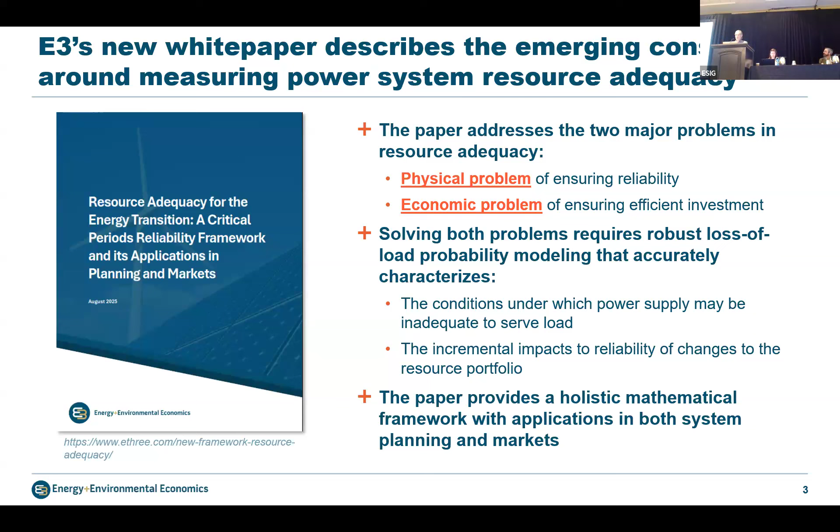Why do we need a scientific approach for resource adequacy need determination and accreditation? Because it's really important. It's too important not to do this scientifically. Determination of resource adequacy need is critical for electric system reliability and is a huge driver of electricity costs for consumers. Accurate accreditation is a primary signal for the value of new resources and is necessary for economically efficient investment.

And if someone were interested in hedging their risks against volatile capacity spot markets, what you need is a fundamentals-driven, well-formulated spot market in which you can reasonably anticipate potential price movements, so that your hedges can be effective and you know how much to pay for them. If you're doing your accreditation based on a heuristic, or even worse, based on politics, those are risks that aren't easy to hedge, and those will make your hedging activities likely ineffective.

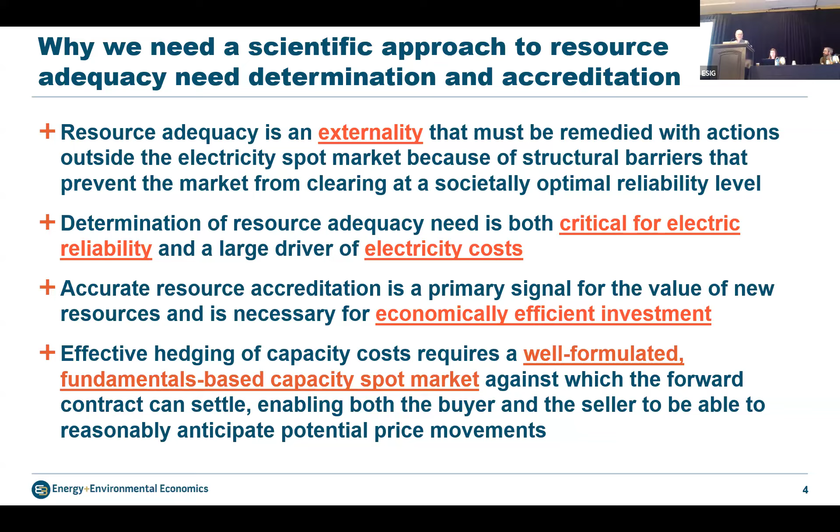And the recent developments in the industry have really made clear the need for a change in our traditional accreditation methods. We're already seeing that the hours that are critical for reliability are not necessarily the peak load hours. California's rotating blackouts on August 13th and 14th of 2020 occurred in the evening after the sun went down, not during the afternoon when load was highest.

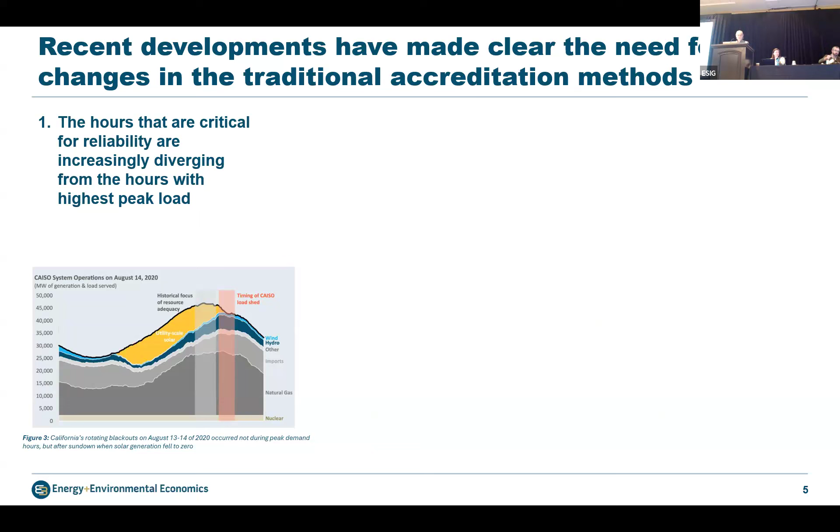Relatedly, we're seeing that saturation and interactive effects among variable and energy limited resources are becoming increasingly important as the penetration of those resources grows, and accurately capturing those phenomena will be critical for accreditation and reliability.

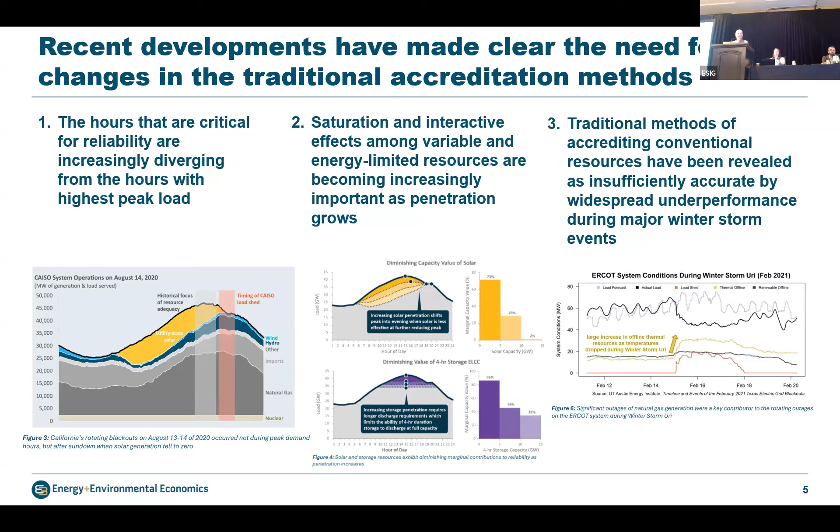And while there's been so much attention paid on the accreditation of renewables up until now, what we really are seeing the last few years is that the accreditation of the thermal fleet is actually way more important than whatever we do with renewables and energy storage. And we've seen that our thermal resources have not performed at their accredited values during recent very extreme winter weather events. And so that makes it really critically important to accurately and scientifically accredit those resources as well.

So the key elements of the critical periods framework that you'll read about in our paper, which I'll go through one by one in my talk today, are the following four. The first step is to determine the total reliability need.

This is based on the quantity of equivalent perfect capacity needed to meet a specified reliability standard. The second step is literally a derivative of the first, which is to calculate the marginal ELCC of individual resources based on their contribution toward the total reliability need, which can also be seen through their expected performance during critical periods, as I will go through.

The third step is to determine the total procurement need, which is different from the total reliability need, because of the phenomena we're talking about, the critical periods moving in time. The total procurement need is the sum of the marginal ELCCs of the individual resources in a reliable portfolio, or equivalently, the expected load during the critical periods.

The last step is to allocate that procurement need in a market to load serving entities, and that should be done based on their expected contribution to the need for capacity, i.e. their expected load during critical periods.

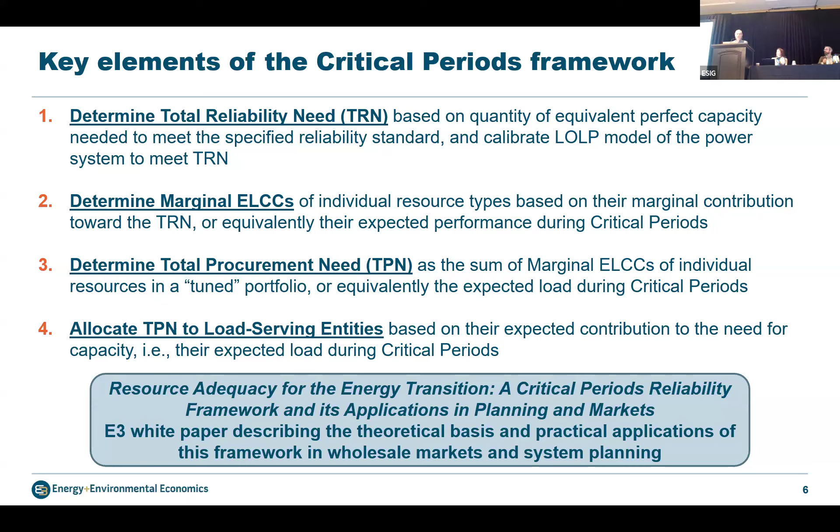Loss of load probability modeling is the foundation for all of this analysis, the foundation of the mathematics. Loss of load modeling can be thought of as an organized way to consider all of the conditions in which supply might not be sufficient to serve load, including very extreme weather creating high loads in any season, summer or winter, and correlations between load and renewable supply conditions, energy and capacity limitations.

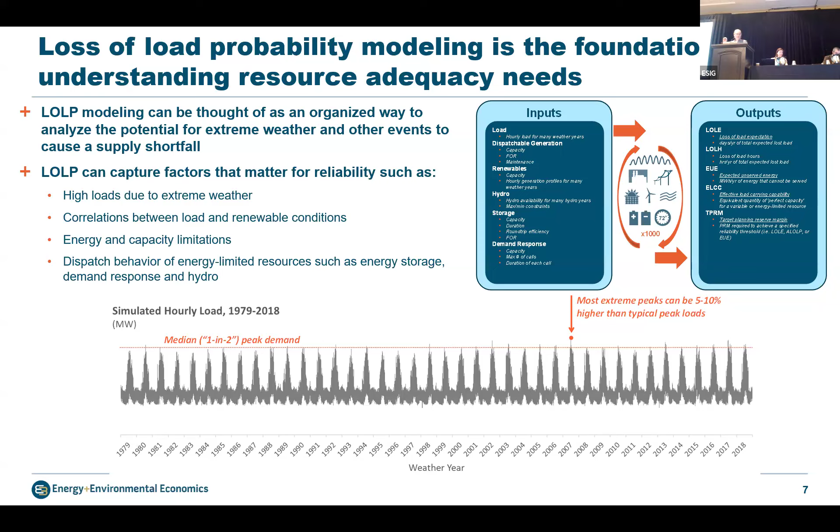Even though our megawatts are denominated in capacity, loss of load probability modeling and ELCC also capture energy limitations and any correlated outages, and other dispatch limitations.

We define the total reliability need as the quantity of perfect capacity that is needed to reach your selected resource adequacy target. One day in ten years is the target most commonly used.

There's nothing magic about that target, other than it's like once in a long while, like the frequency with which you hope politicians won't get too mad if you have to shut off their people's lights. I don't think it's more economical or scientific than that, but it could be. And if you wanted to make this extremely scientific, that fits in at the front end of this framework and becomes your standard off of which everything else is developed.

Your planning reserve margin is the quantity of perfect capacity needed, your TRN, divided by the one-in-two peak load, by convention. And again, you could do that a different way. By convention, it's divided by the one-in-two peak load, minus one. And that also considers, even though it's based on your peak, performance and loads throughout the entire year. It's not just a peak-based standard, because the modeling considers every hour.

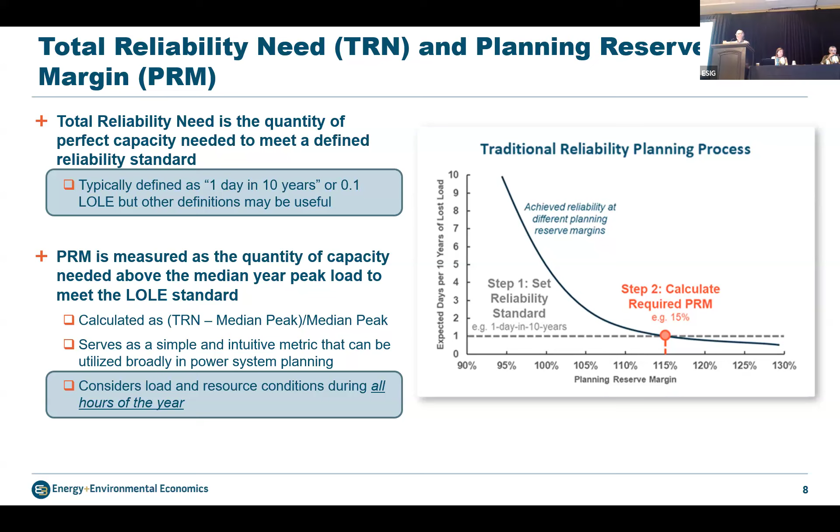The PRM is really a residual calculation. It's not strictly needed in the construct, but it's convenient and useful because it helps you understand what your need is and how it changes as your load changes.

The conventional accreditation framework rests on simplifying assumptions that are increasingly inaccurate. In effect, we've been treating the capacity of a system as if it's a linear function of all of the resources in that system, and we have added up our capacity using a simple summation.

The original version used the installed capacity method: add up all my megawatts. I know that my megawatts aren't always there, so I add a reserve margin on top of that to reflect the fact that my resources aren't all perfectly reliable. And I'm good to go.

And that works as long as the following conditions occur: there are small differences in forced outage rates and performance among my resources, and each resource is independent, so there's no interaction between them.

Then I can incorporate forced outages through performance penalties and use a UCAP method instead of an ICAP method, and I get a little better. But even a UCAP method isn't good enough, isn't scientific enough, and the reason is because you rarely have loss of load when you have an average number of thermal resource outages.

If a normal set of outages is happening, you're probably fine. What happens is, the time you're most likely to have loss of load is when you have more than usual, a greater than usual number of thermal outages.

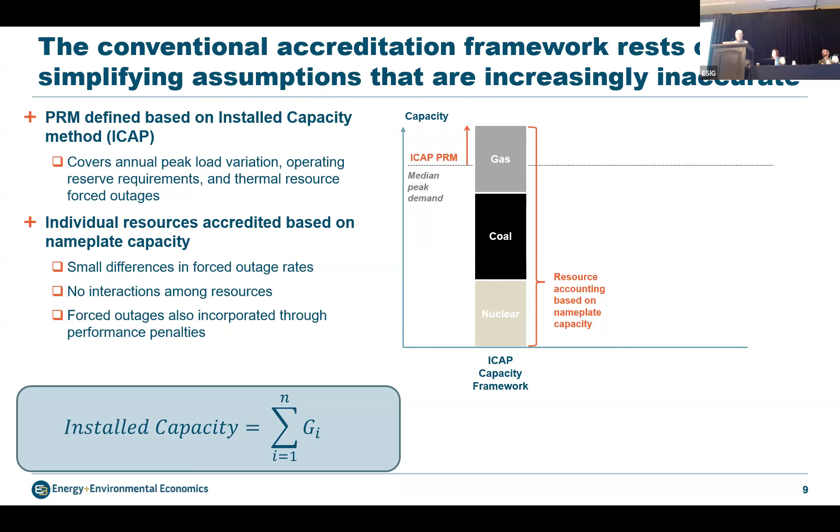So when we add up all the resources that are offline during all the loss of load events we observe, it's generally much higher than the EFOR rate of the entire fleet. So even UCAP is an overestimate of the performance of the thermal fleet.

So we need to move to a better framework. The critical periods framework is more accurate and it's more adaptable to a diverse resource mix. Here now we define the PRM just based on the need for equivalent perfect capacity. This now makes the PRM independent of the resource portfolio. It's only based on load and maybe operating reserves.

Remember, in the old framework, the PRM was dependent on your accreditation. So the worse your accreditation was, the higher your resource need would be, the higher your PRM would be. Here our PRM is independent, and all of the resource infirmities are captured in the resource accreditation. This is necessary because we now have large differences in availability during critical hours. It would be absurd to credit solar or wind at their nameplate value alongside gas or coal.

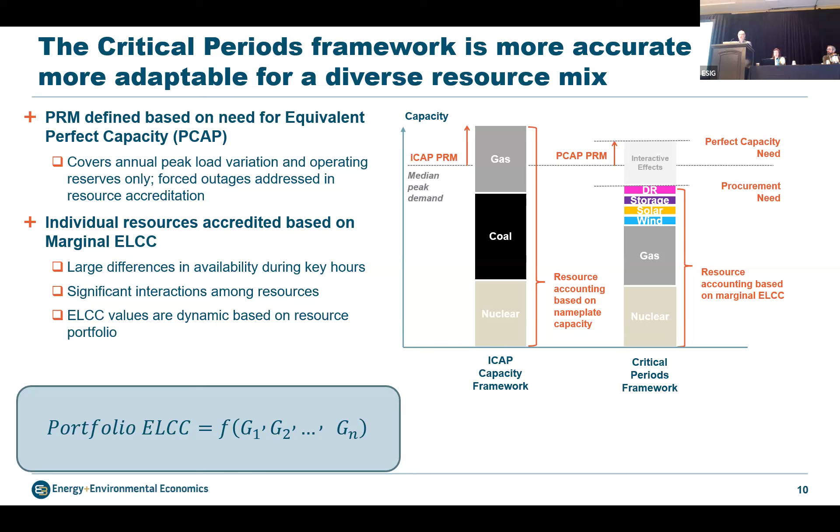There are significant interactions among resources, and ELCC values are dynamic based on the portfolio. So it's not a simple sum of the resources in the portfolio. It's actually a complex function of each of the individual resources in the portfolio.

This complex function looks like this. The portfolio ELCC is a function of each of the resources. It's a multidimensional function. The marginal ELCC can be thought of as the change in the portfolio ELCC with the change in any one of the resources. So it's rise over run. In other words, it's the partial derivative of the portfolio ELCC function with respect to change in any one resource type.

The functional form of the surface is unknowable. We only observe this through the functioning of our loss of load model, but we can measure the gradient of the surface at various points on it to help us understand how our total portfolio ELCC changes as we change the portfolio.

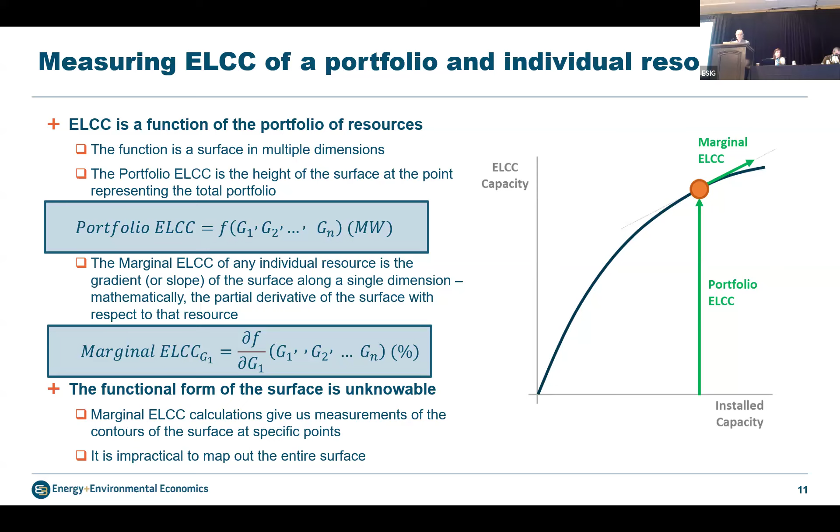So this reflects the fact that no resource is perfect. Every resource is compared to an equivalent perfect capacity resource, which creates a level playing field for all resources in the portfolio, again, accounting for all the factors that can affect resource availability during the critical hours, including energy availability, hourly variability in output, duration, use limitations, correlated outages, temperature-related derates, et cetera.

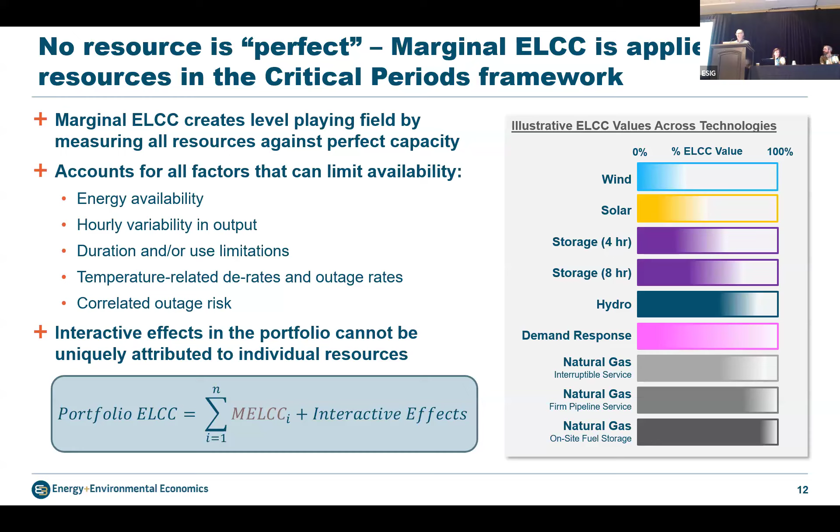Now, we need to recognize, and a key part of the paper is understanding that there's a difference between the sum of the marginal ELCCs and the total amount of capacity that the portfolio provides. These are the interactive effects. And it's really mathematically impossible—there's no mathematically unique way to allocate these diversity effects, these portfolio effects, among individual resources in the portfolio. You can really only think of them as belonging to the portfolio as a whole. And that becomes important for procurement, especially in the market context, as we'll see.

So the marginal ELCC framework is important for both system planning and markets. For system planning, we need accurate marginal accreditation to identify optimal resource additions. We don't need to accredit existing resources just for planning. We just need to know how much total, cumulative capacity our existing resources give us, and then how much new capacity new resources give us.

The market implementation is a little bit different because we do have a need to accredit existing resources in the market. And we have to accredit them based on market concepts also at that marginal level, the marginal ELCC. Why? Well, first of all, existing resources are a perfect substitute for new resources. We need to accredit new resources accurately to have efficient investment. We need to accredit existing resources the same as new resources because they're perfect substitutes for each other. And because in a market, all grid services are compensated at their marginal value. That's what markets do. That's what sends efficient signals. That's what our markets are supposed to do.

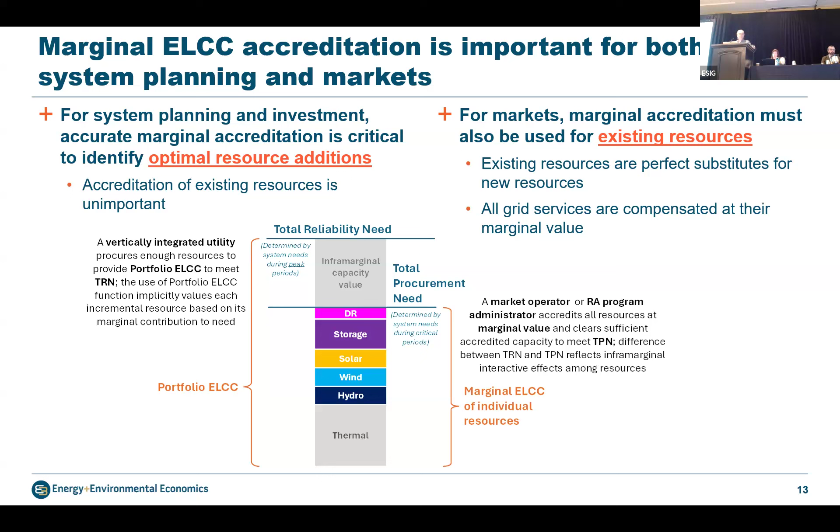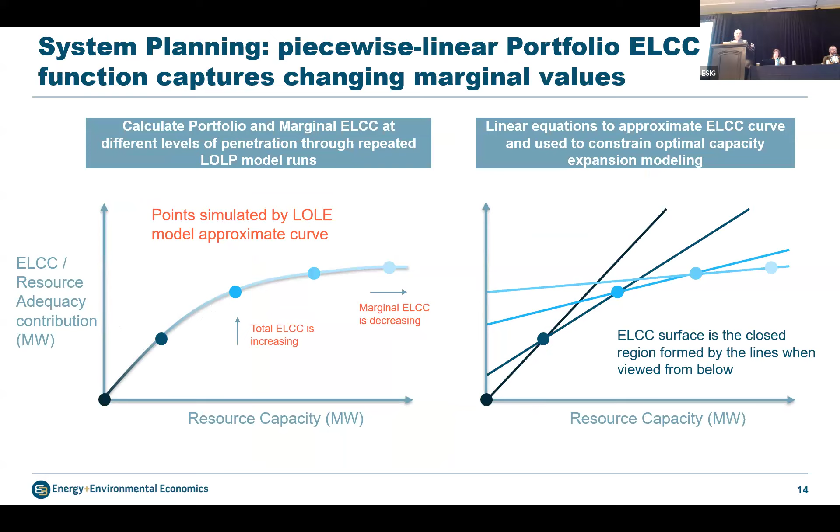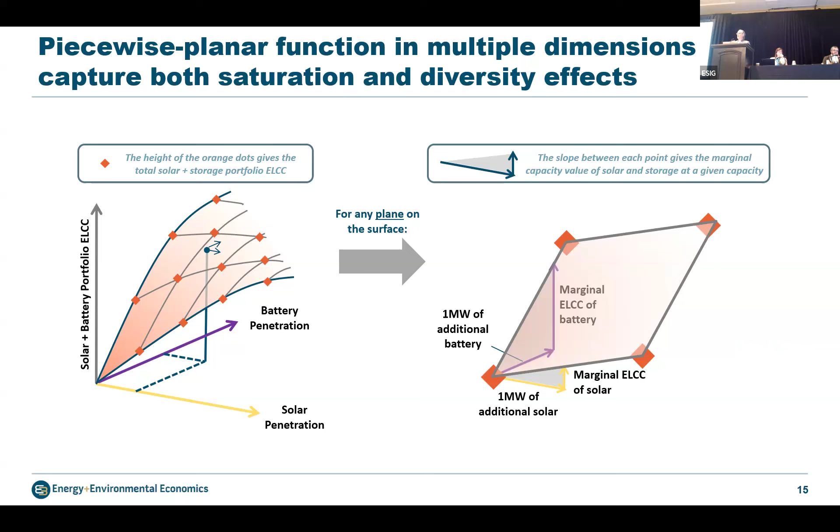For system planning now, we can take these ELCC concepts and sketch them out over large changes to the portfolio, creating ELCC curves and/or surfaces in multiple dimensions. This helps us understand, as I change the amount of resources I have in the portfolio along any dimension, how much the total reliable value of my portfolio changes. That's what helps me understand how to make efficient investments in my system.

In markets, we accredit all of the resources based on those marginal values. But we have to introduce this new concept, which I mentioned earlier, called the total procurement need, which is less than the total reliability need by the amount of those interactive effects.

So the total procurement need is in effect the sum of all the marginal ELCCs in a reliable portfolio. And all the math is in the appendix of the paper, so you can go and trace that all out if you're of the mind to do that. And I expect in this room, some people will want to do that, which is exciting.

It's both the interactive effects that I get from a portfolio of a whole bunch of different resources, where the marginals add up to my net peak. I'm confident because it derives from the loss of load math that I have enough resources to meet the gross peak — in fact, all loads up to a 1-day-in-10-year standard.

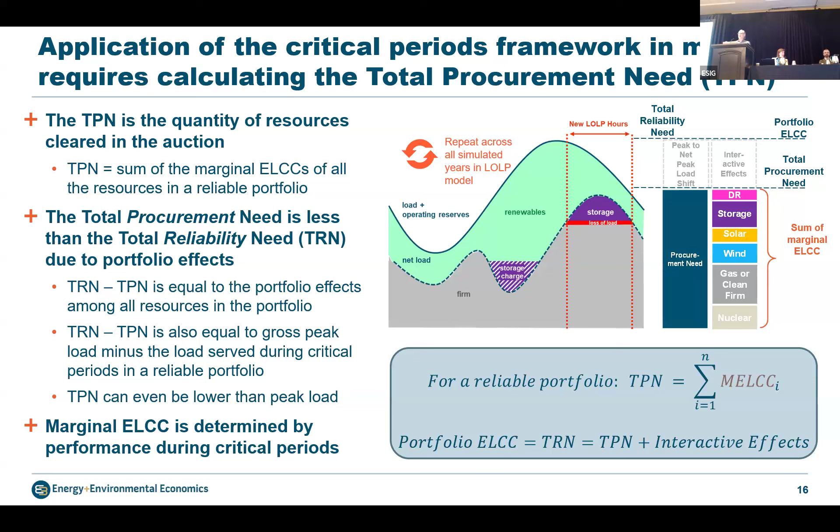So what the paper tries to do is just describe where most of the markets are moving and where many of the utilities are moving as well. It doesn't really break new conceptual ground — it really reiterates concepts that are out there, but hopefully puts them together in a framework that kind of ties together the planning and the markets.

And just to show you a map of all of the markets that are moving towards this framework in general: New York ISO was the first one, then PJM, MISO, and ISO New England is also proposing to move to an MRI approach. They're all using different computational methods, and we'll hear a lot today about the different computational methods.

But they all are largely doing the same conceptual thing, which is looking at those critical periods when we really need the resources, when we're most likely to have a loss of load event, looking at how each resource performs during those types of events, and using that as the basis for both need, procurement determination, and resource accreditation.

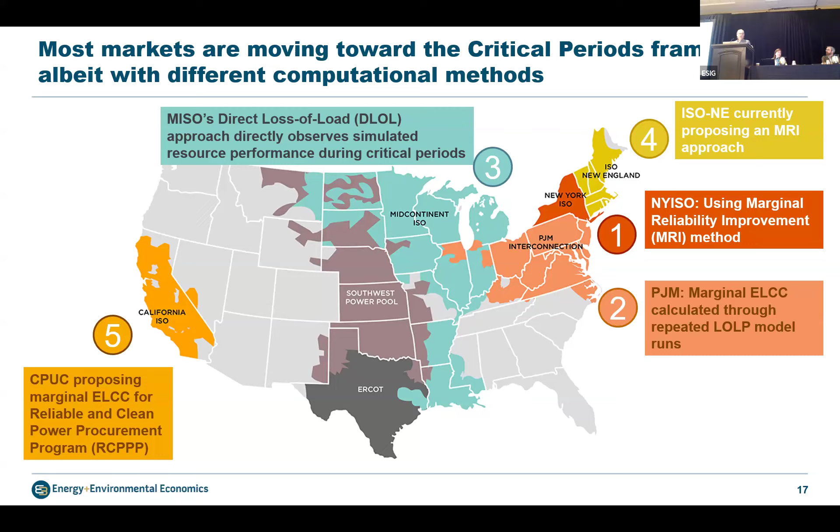And then lastly, I'll make one final point about an aspect of the framework that none of the markets are really doing yet. MISO is the closest to this — they're looking at this, which is to allocate the need also based on that load during the critical hours.

Most of the markets are still allocating need based on the peak hours, even as their accreditation recognizes that the resource performance is most important during the critical hours. And this creates a disconnect between the signals that are sent to loads and the signals that are sent to resources.

This is most easy to understand using an electric vehicle example from California, where we're actively encouraging people to charge their electric vehicles during the daytime when we don't have a resource crunch. This increases the peak load and might increase an LSE's allocation of the system-wide need, thereby increasing their costs, even while it's helping the system become more reliable and reducing costs for the system as a whole.

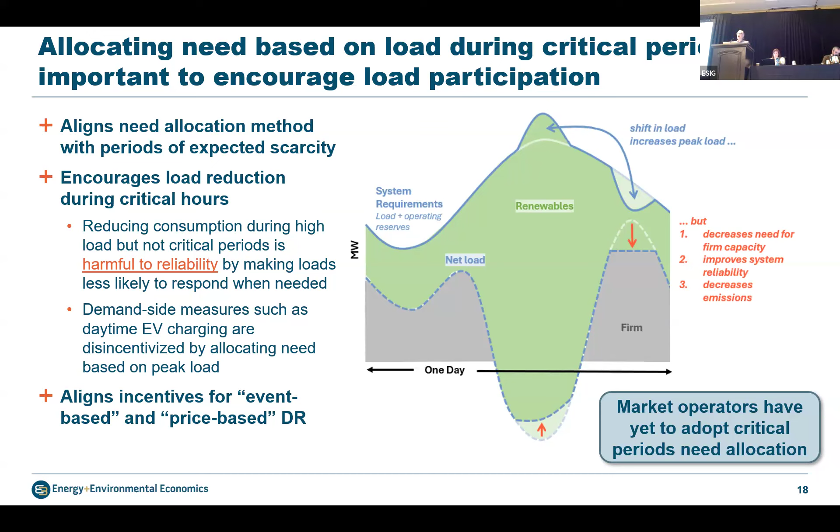So you can see the perverse incentive that this sends and the need to correct this by targeting our resource and need allocation to the LSEs based on their contribution to the actual need on the system, which is during the critical hours. So I hope that was helpful as an overall framework, and I'm looking forward to hearing the rest of the panel. Thank you.

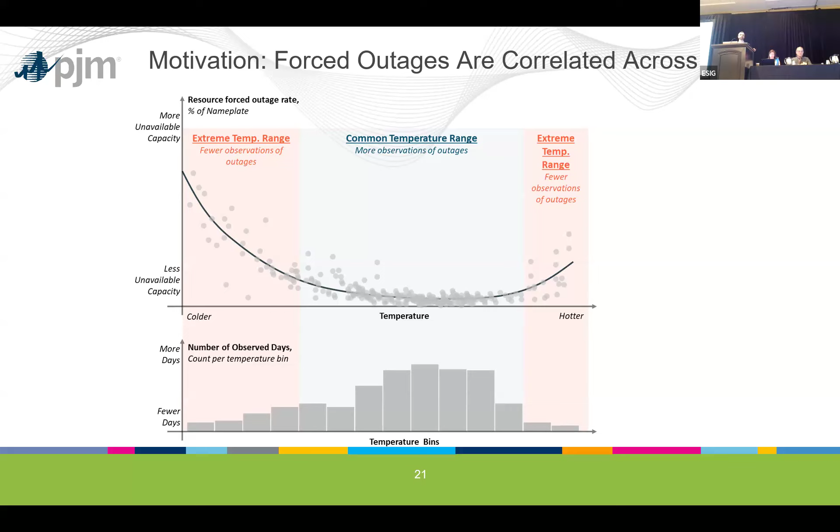That's the motivation why we really wanted to dive into this. In some sense, the motivation was just as much about getting the risk modeling right as getting the accreditation right, because the accreditation really just pops out of the risk model.

I don't really have to spend too much time on this. PJM has what we call an ELCC framework, but really we calculate it in a way that's consistent with MRI, just like New York and New England. I probably don't have to go through the math because Arne already did.

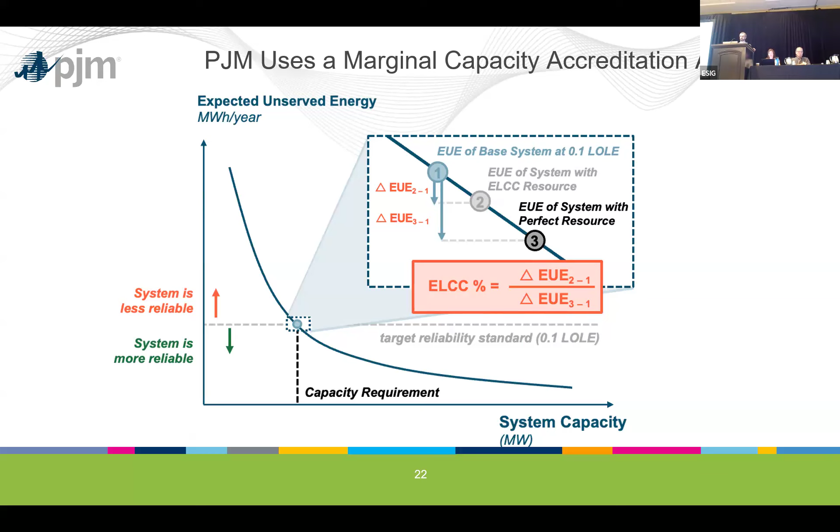So just to give an overview of how PJM puts these pieces together, and I'll try to keep an eye on the time: PJM looks at 30 years of weather history going back to 1993. We derive, using those weather inputs and other inputs as well, a load forecast model essentially for each historical weather scenario.

We also take a projected resource mix and performance for the delivery year in question, and model the unit, class, and fleet performance for thermal and variable generation as a stochastic function of temperature by resampling against historical availability, for which we have data back to 2012, not 30 years. I'll talk about how we match the historically observed performance to the longer weather history in a bit.

Then we plug all of these into a giant Monte Carlo simulation model where we take the 31 different weather years, different load scenarios for each of those years, and 100 alternate resource adequacy performance draws for each of those 31 times 13, and you get something like 40,000 simulated years.

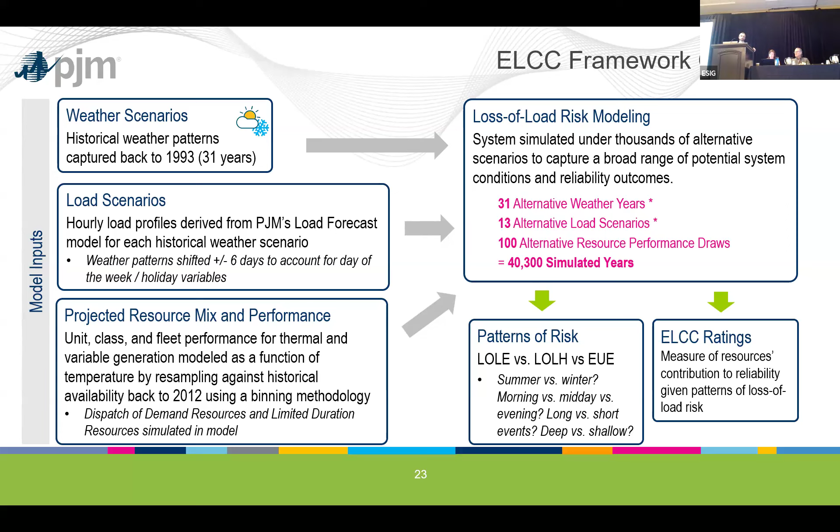One item of interest: while we calibrate to a performance target expressed in LOLE terms, 1-in-10 LOLE, our ELCC ratings are actually based on relative improvement—the improvement that a given resource or resource class has in terms of EUE reliability, assessed in EUE terms, relative to the improvement that a perfect resource has.

I think I'm going to skip this.

So we construct hourly load scenarios, so 365 times 24 hours times some number of different scenarios for each of the weather years using our PJM load forecast model, which conveniently transitioned to an hourly model right just in time for us to implement these changes when we were considering them.

And we essentially have inputs to that model that take the 31 weather years and apply what we call a weather rotation in order to essentially get sort of a what-if scenario. What if this weather had occurred on days that looked a little bit different, particularly along the dimension of day of week. And so we get out of that some additional load profiles, and we add some load variability as well, accounting for, you can think about it as load forecast error or model error, the residual in the model.

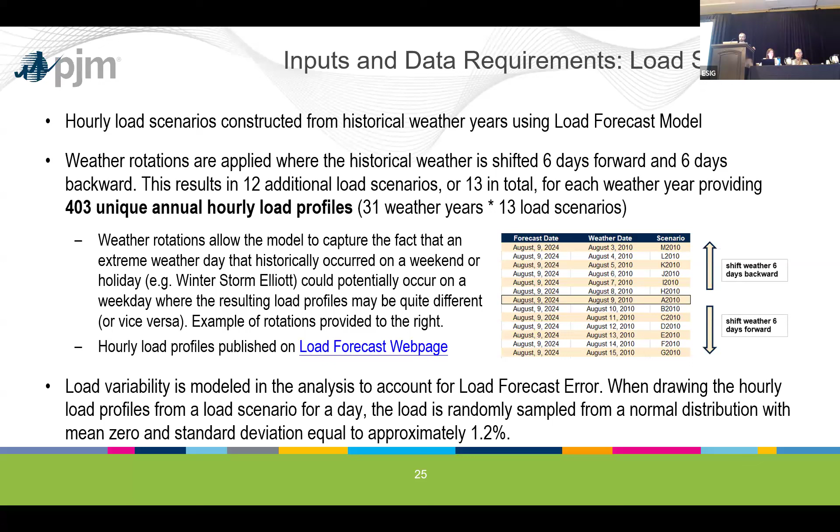And then I'm going to talk just a bit about how we model each of the different resource classes in the accreditation model. For thermal resources, which we call unlimited resources, we take forced outages and ambient derates matching historical weather, and we take planned and maintenance outages where they're basically calibrated to historically observed planned and maintenance outage patterns. So they're not exactly what was observed in terms of specifically when a given resource took a maintenance outage, but there's a little bit of a heuristic in how we do that.

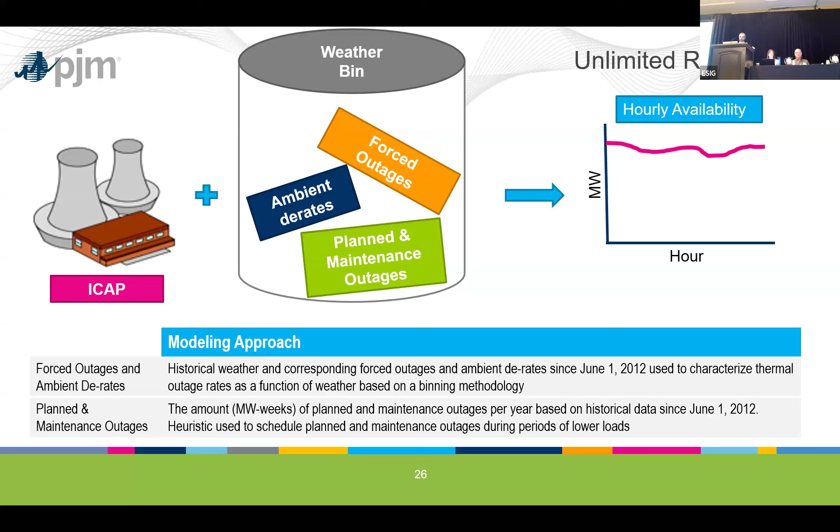For variable resources, actually, let me jump to this one because I think I'm running low on time. I think this is one of the key concepts. We use an approach in order to try to mix and match in a way that is appropriate and respects historical data to try to answer the question of what's the distribution of how any given resource class and the fleet would have performed if a certain weather pattern had occurred on a given day, and that weather pattern was matched with the load forecast associated with that weather pattern.

So the way that we do that is by essentially grouping the temperatures. In winter, we group by daily low temperature. In summer, we group by daily high temperature, and essentially matching similar observations across the 30-year history. And when we're simulating a given weather year for the delivery year, we look at for each day what weather or temperature bin that day falls into, and then look at the historical data back to 2012 and sample from one of the historically observed fleet-wide

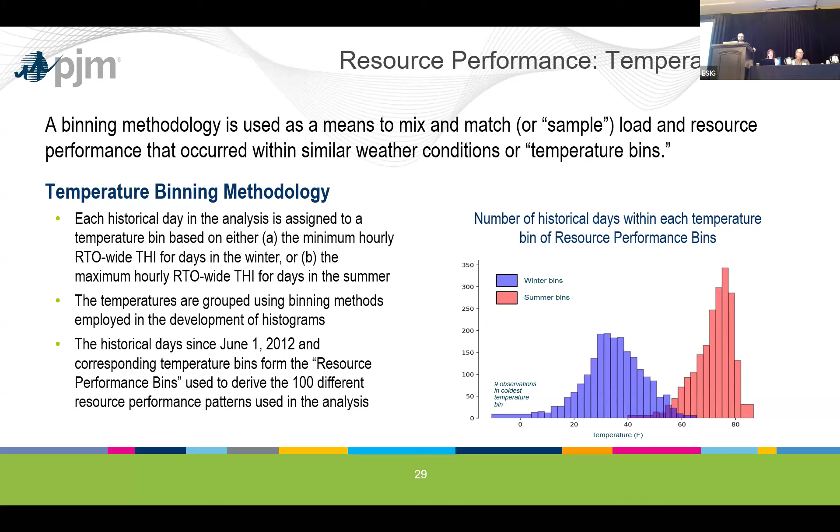performance patterns. And importantly, we sample fleet-wide, which means that we preserve all of the correlations across different resources within a resource class, and we preserve correlations across resource classes, say between wind resources and solar resources and thermal resources and so on. And so what we get out of that is something that captures the relationship between performance and temperature, but even beyond that, preserves the correlated nature of forced outages and resource performance, even beyond what can be directly explained by temperature. And I think I just went through this.

And then you put that all together. So you do that on the resource performance side, and on the load side, you basically say, okay, this is the load that I have to meet. We do have a little bit of a dispatch logic in there for when storage resources are dispatched, for when demand resources are dispatched, and so on. But essentially, in each day, you're just trying to answer the question: did I or did I not have enough generation in order to meet the load on this day? And this is what pops out.

What we end up seeing in PJM is that, in contrast to our historically observed or what we believe to be our historical risk patterns based on peak load conditions, where the majority of the risk occurred in summer to a great degree, what we see in PJM now is that a large share of the risk does in fact occur in the winter, when our peak loads are something like 10% lower than peak loads in the summer. And the big driver of that is the variability of resource performance in the winter.

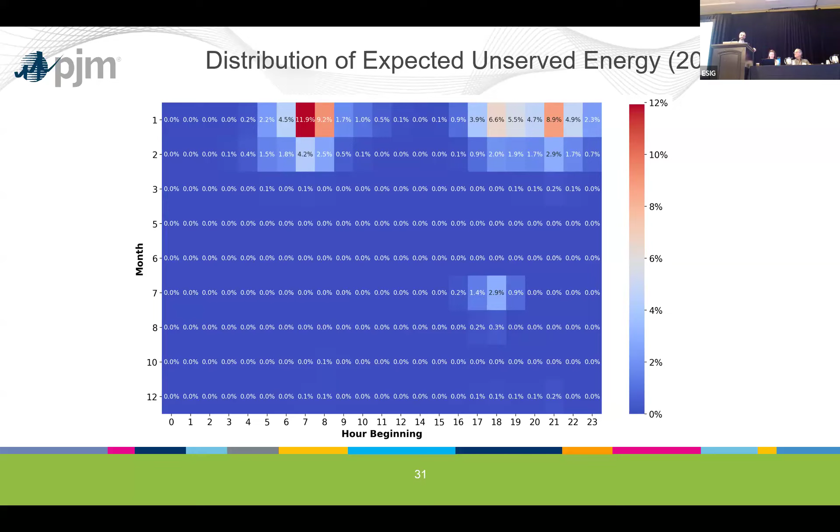Thank you very much, Walter. That was a great overview of PJM's recent capacity accreditation refinements. And now we move on to Michael Robinson, who's Principal Market Designer at MISO, and he's going to explain their direct loss of load accreditation approach.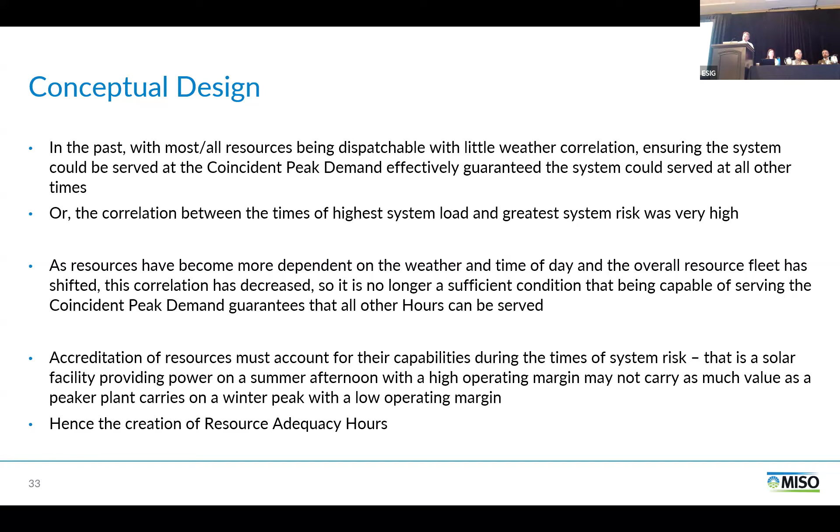But Arne showed, and also Walter showed, that times have changed. Now with renewables, we have risk across all seasons. And so it's appropriate to now think about accrediting resources, not only by class, but individually by how they can contribute at the times of greatest system risk. And so what we created is what we call resource adequacy hours.

Now, the definition is we're going to look at all the hours in a year where we've declared a max gen alert or something worse than that. Max gen event, max gen warning. If we don't have enough, then we have some rules where we go out and gather additional hours up to 65, where we have the tightest operating margins.

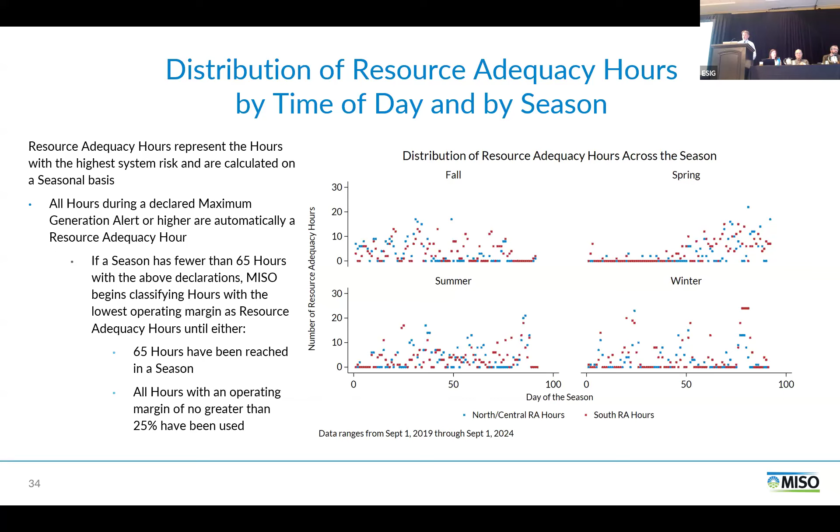And so we're using a two-step approach called the direct loss of load methodology. And the first part is a forward-looking approach. And Walter had a nice slide that talked about the Monte Carlo effort. We do something similar. I don't think we have nearly as many runs as you guys do, but we do a lot of Monte Carlo runs. Looking forward, trying to assess on a resource class basis. Okay, so resource class, a gas combustion turbine, one class, gas combined cycle, all like that. That's why I told you the story up front, talk about classes. That's how we tie it in.

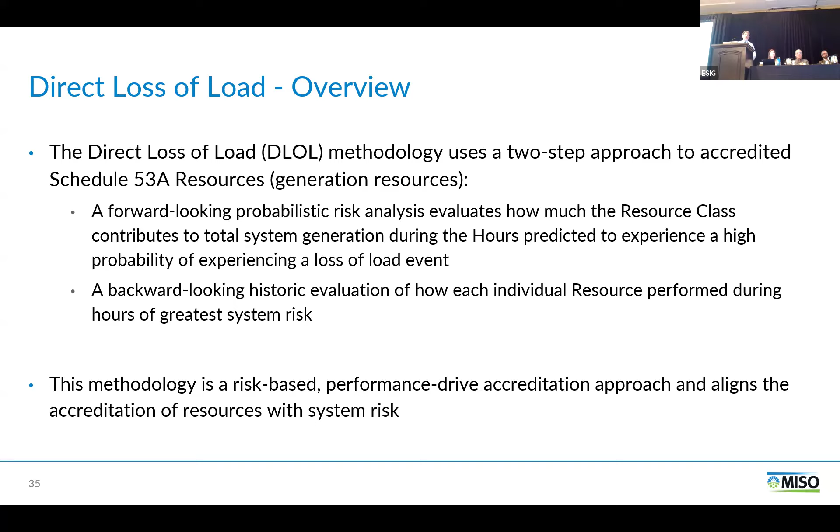On a resource class basis, we're going to look at the contribution that class is giving in terms of total system generation that's available when we have the greatest system risk. Okay, and then the second step is a backward looking where we assess the contribution of every individual resource. And so the better you are as a resource in terms of planning your outages and being available at the times of system risk, the more accreditation you get.

So here's the first step, the forward looking. This is Monte Carlo. I'm not going to go through this. Arne talked about this. Walter talked about this. We do the Monte Carlo looking forward. The key word here is expectation. We're trying to figure out the expectation that a resource class, how much do we expect it to contribute at the times of expected system risk?

The two expectations there. How do we expect the resource class to contribute when we're at greatest risk on an expectation basis? We do that across Monte Carlo, all the hours in the year, multiple runs, and then we look at those hours that have less than the 3% operating margin. We identify those. And it's those hours where we look at, for each resource class, how much are they contributing to the generation?

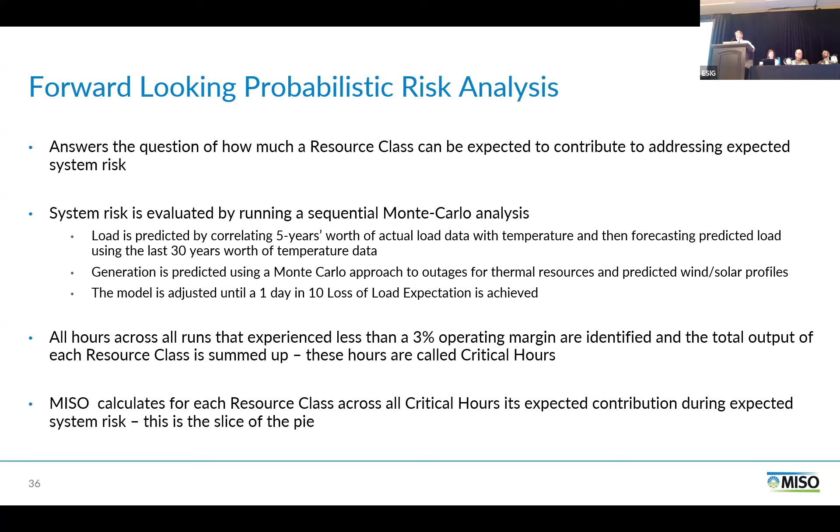That's forward-looking. On a forward-looking basis, that's going to give, on a resource class basis, the size of the pie, the slice of the pie. How big of a slice of the pie is this particular resource class getting in terms of contributing to generation to address expected system risk during those hours? What's the size of that slice of the pie for that class?

Then we go to backward looking, and out of that slice for that particular resource class, now we're going to look at the individual contribution for a resource in that class. Okay, and we're going to look at, were they available to be able to contribute to help meet the system balance during that time, and that's how we accredit individual resources. So resources within a class are competing with each other. If it's more available, it's going to get a higher accreditation value than someone else in that class, and it has to sum up to the resource class accreditation.

So it boils down to, forward looking is an expected value. What are we expecting these classes to contribute during the expected system risk hours? When we go back and look at the backward looking, it's how they actually contributed during those actual hours of system risk.

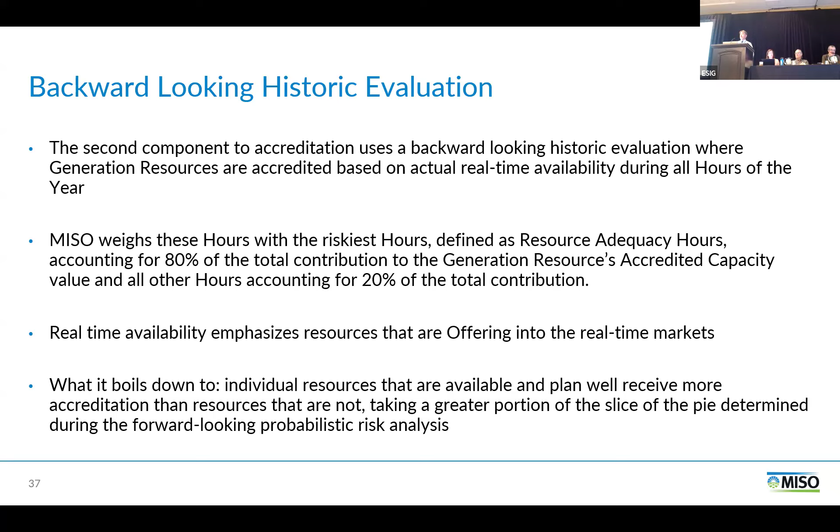So that's what we call Schedule 53A. That's your in front of the meter resources. That's been filed at FERC. That's been accepted. It becomes effective sometime in 2028. We're giving market participants time to adjust. Now we just filed something at FERC. It's still before FERC. We're calling it 53B resources. We have a host of resources that are emergency only. They meet our resource adequacy requirements, but they're only callable under emergencies.

So we don't call on them a lot. In the first 10 years at MISO, we called on these resources 4 times over 10 years: August 1st 2006, and February 3rd, 4th, and 5th of 2007. In the last 10 years, you can probably count on three hands how many times we've called on these—not many. So there's the question of how do you credit these when we rarely call on these resources. That's one of the tasks we're facing.

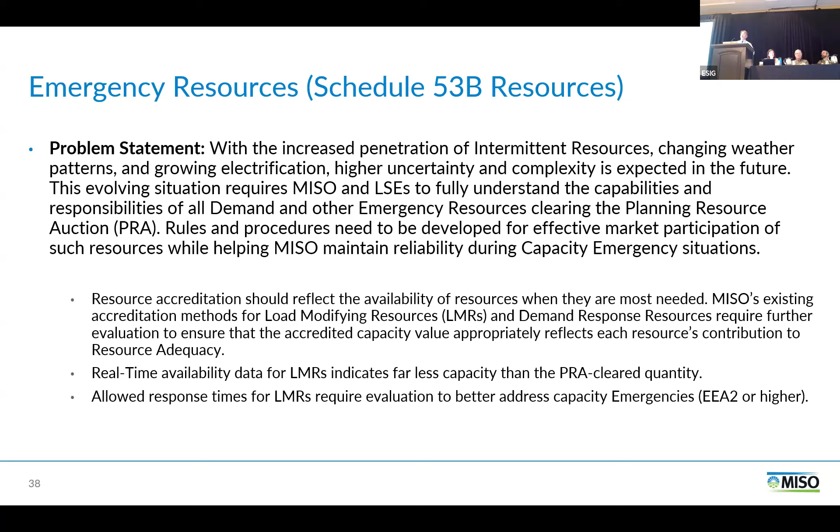When we just had the concern about the system peak, it was a much easier task. We could look at the load behind a particular asset if it's a demand resource—say an air conditioning program qualifying as emergency only. We know the expectation for temperature and humidity in the MISO footprint at the time of MISO's peak, typically 92 degrees Fahrenheit and 85% humidity in the Midwest, so you could figure out how much an air conditioning program would be contributing. But now, with resource adequacy hours and risk spread across the entire year, you have to assess its value over all those hours.

With in-front-of-the-meter resources, we have what are called resource adequacy hours, and we're weighting at 80% during resource adequacy hours and 20% for non-resource adequacy hours, because these resources contribute to the energy balance every day in our energy markets. Emergency resources don't have that day-by-day obligation, only under emergencies. So we developed what are called capacity at risk hours—we're only going to look to accredit them during those capacity risk hours.

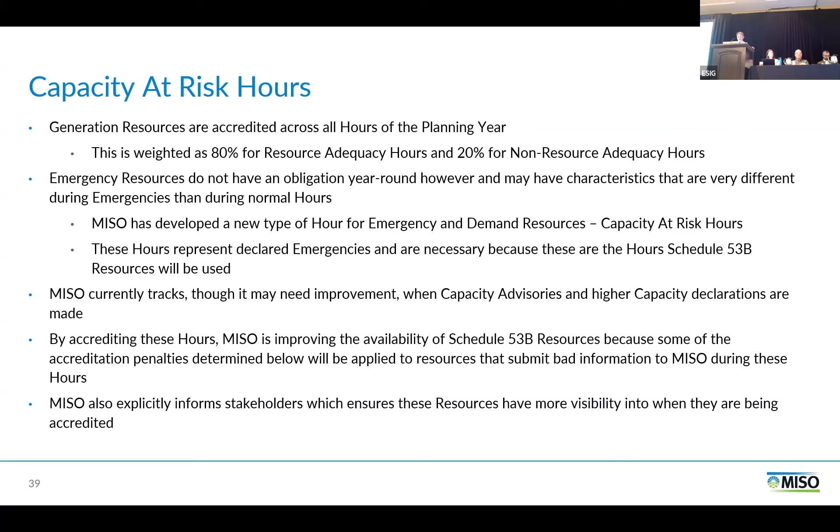The accreditation for these types of resources doesn't depend upon your participation model. We have lots of different types of demand resources—load modifying resources, demand response resources, and so on. Those determine how you get deployed, whether you get compensated at LMP, and your other obligations. But accreditation we're going to do differently, based on how we attempt to measure them through measurement and verification techniques.

So we have all these different participation models, but in our tariff it's called Attachment TT. With demand resources, you can't put a meter on what wasn't consumed, so you have to try to measure the counterfactual. We do this with different techniques: a calculated baseline, which is a 10-and-10 baseline event; direct load control, for legacy water heater or air conditioning programs where customers don't have interval meters, requiring statistical techniques to estimate contribution; statistical intervals, where thousands of customers have smart meters but you still need a randomized controlled trial or similar method; and the firm service level.

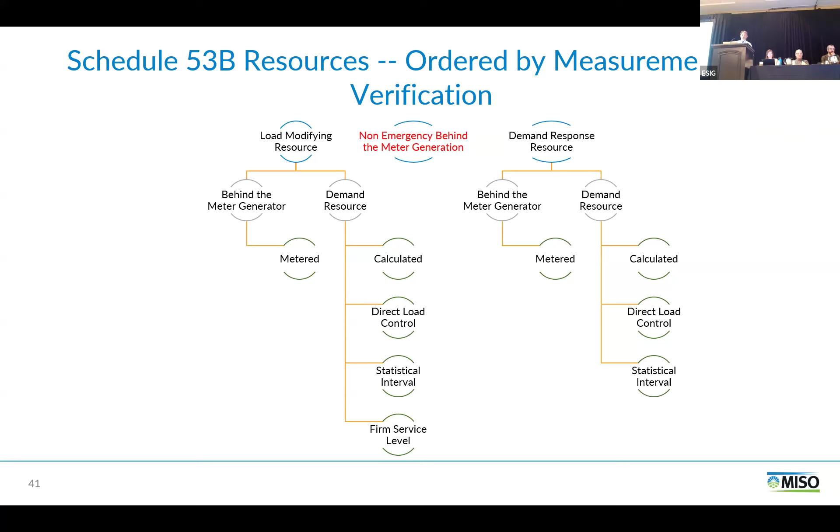Depending on how we're measuring them, we use different accreditation techniques. The problem we need to solve is that we rarely call on these assets, but they still have to report availability. In the past they haven't been reporting—they've just indicated they're not available. That's not good, so we're trying to improve our techniques. There were a few cases, about 3, of market manipulation and fraud in MISO involving demand response assets. We've tried to address that through improved market rules, stood up a demand response team, and we're asking for hourly load meter data for the load behind these assets to figure out what they're doing 24/7, so we can improve measuring the counterfactual.

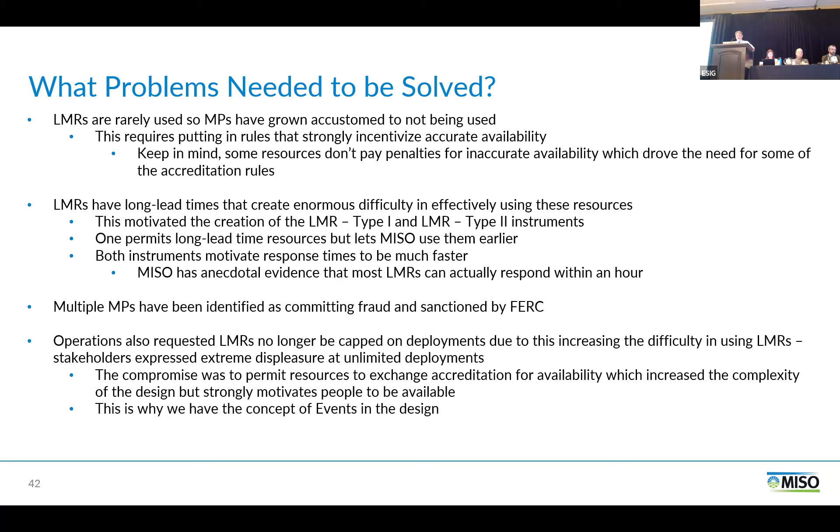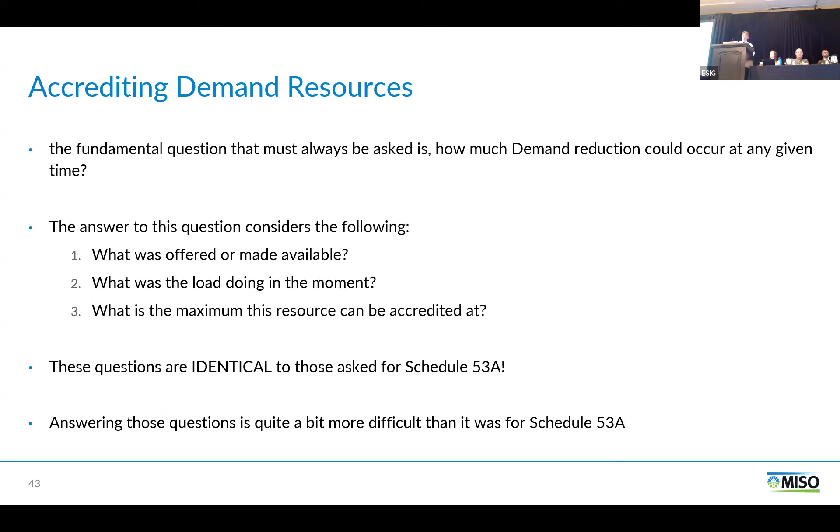We've driven our attempt to accredit these emergency-only resources straight off of how we do in-front-of-the-meter generation resources—looking at what's been offered, what's available, what the load was during that moment, and the maximum amount this could be accredited with. This is reflected in the filing we made at FERC. There's lots more detail, and again, it really depends on how we're trying to measure these kinds of assets, where you can't put a meter on what wasn't consumed. And with that, I'll end it. Thank you.